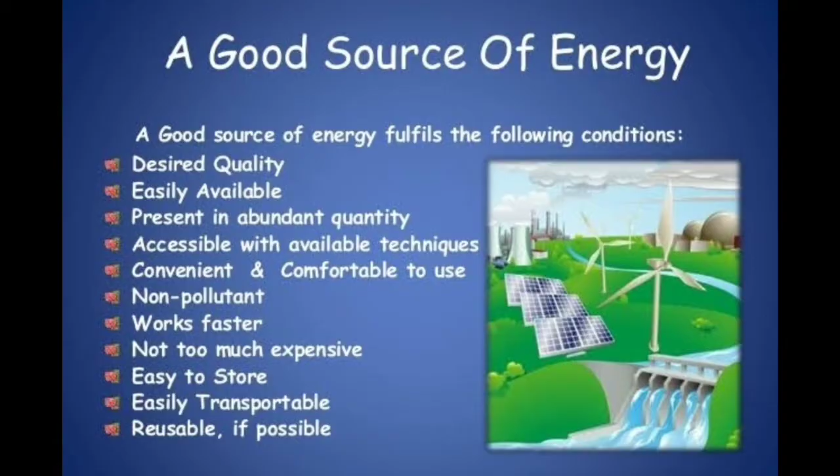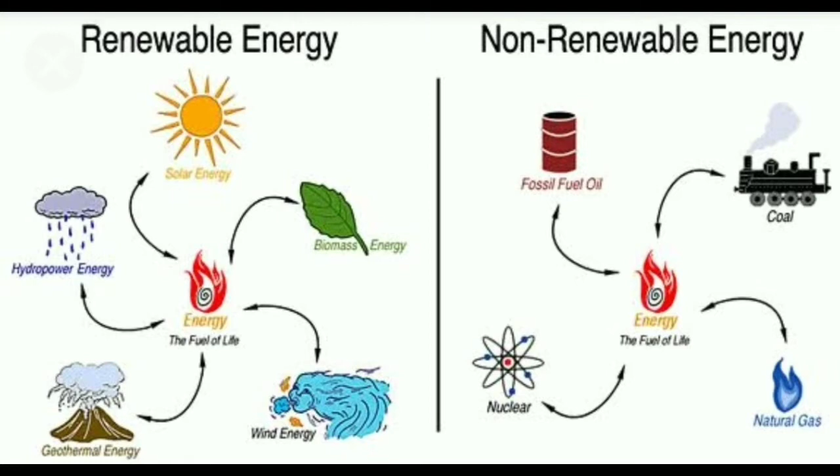Sources of energy can be categorized as renewable and non-renewable. The energy which can be replenished again is renewable energy, with sources like sun, water, wind, biomass, and geothermal. The energy which cannot be replenished again is non-renewable energy, with sources like coal, petrol, natural gas, and nuclear.

Conventional sources of energy are convenient to use, present in limited quantities, and have been used for a long time. Once they are depleted, they cannot be generated at a speed which can sustain their consumption rate.

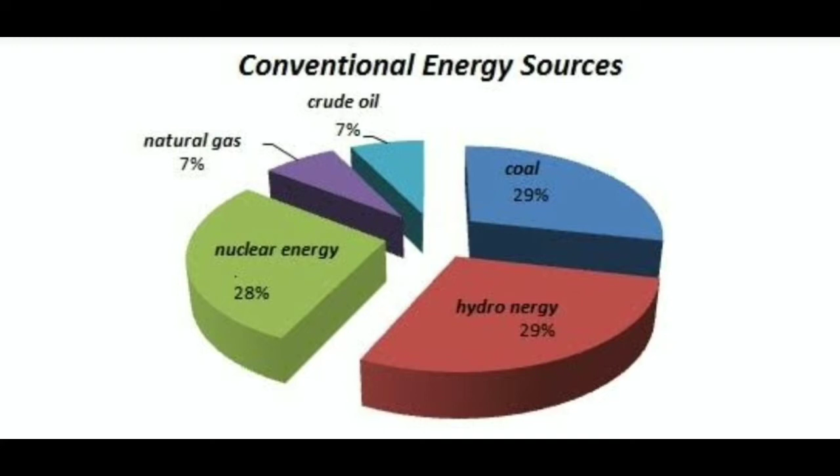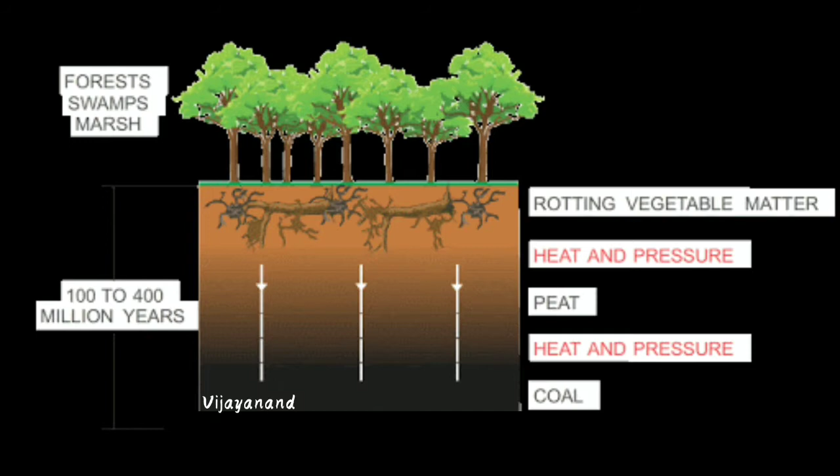Let us see how fossil fuels are formed. Fossil fuels are formed from decaying plants and animals that have been converted to crude oil, coal, and natural gas by exposure to heat and high pressure in the earth's crust over hundreds of millions of years.

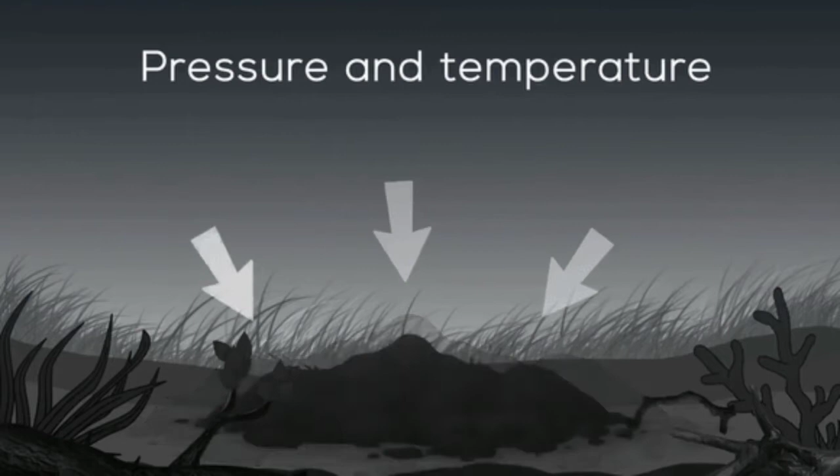To reduce pollution by increasing efficiency of consumption, electricity can be generated by thermal power plants. Large amounts of fossil fuels are burned every day in power stations to heat up water and produce steam which turns the turbine.

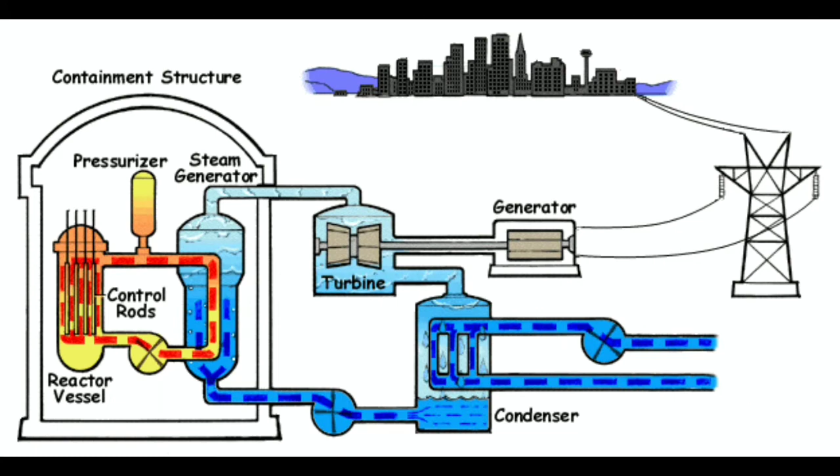The steam is converted back to water by taking out heat from it, done using a condenser. Rotating turbines move generators and electricity is produced, that is, mechanical energy is converted to electric energy. This is a major way of electricity generation, but it has certain problems like pollution, deforestation, and many more.

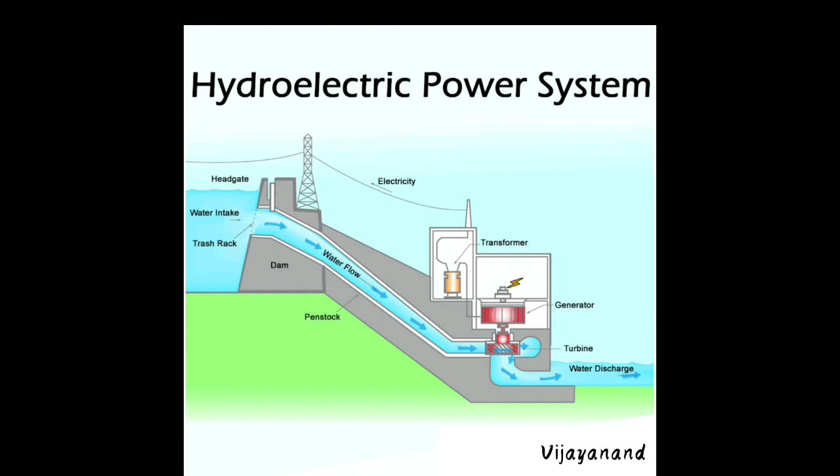Hydropower plants: potential energy stored in a dam is converted into kinetic energy of water. Fast flowing water is brought from the dam to the turbine, which rotates and drives the generators to generate electricity. Because of this, there are forced migrations of many people, submerging of forests and fertile land, and effects on aquatic life.

Biomass: the fuel obtained from living organisms is said to be biomass. All organic waste decomposes without oxygen, that is anaerobically, releasing gases like methane, carbon dioxide, hydrogen and hydrogen sulfide. These gases are stored and drawn through pipes for use, and the slurry left behind is used as manure.

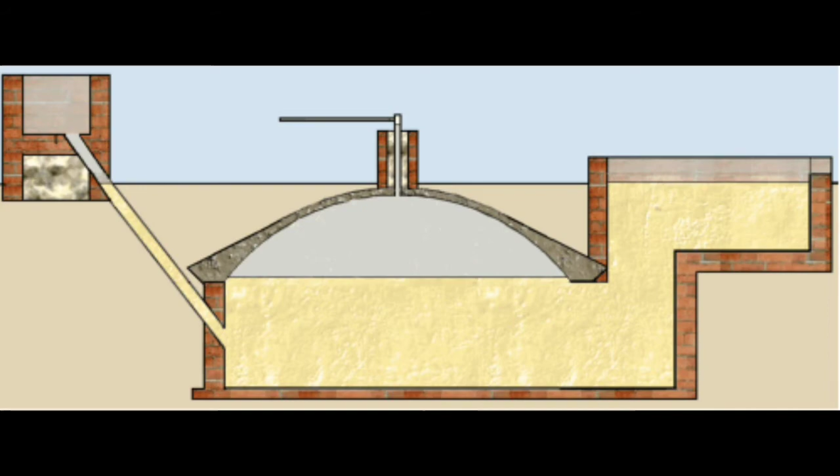Wind energy: the unequal heating of landmass and water bodies by solar radiation generates air movements and causes the winds to blow. As wind strikes the blades of the turbine, the blades rotate the axle of the turbine, which is connected to the generator through a gearbox, and mechanical energy is converted to electrical energy.

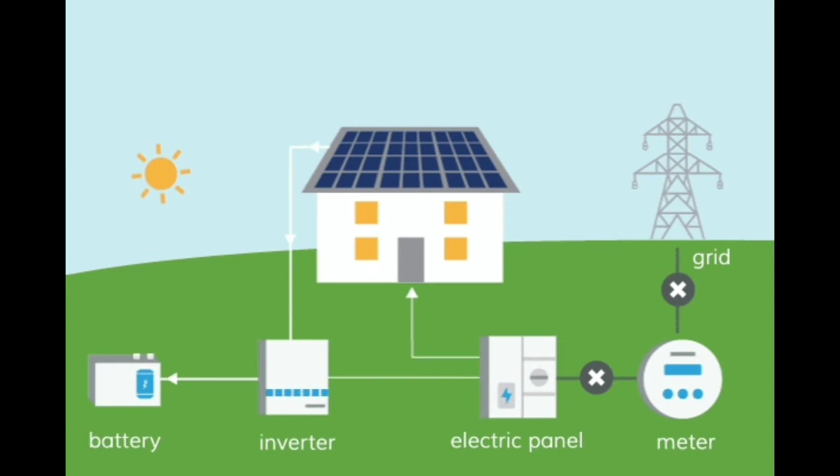Some non-conventional sources of energy: solar energy. Electrical energy can be generated directly from solar radiation without using generators and without using the principle of electromagnetic induction. Solar photovoltaic cells convert solar energy into electrical energy.

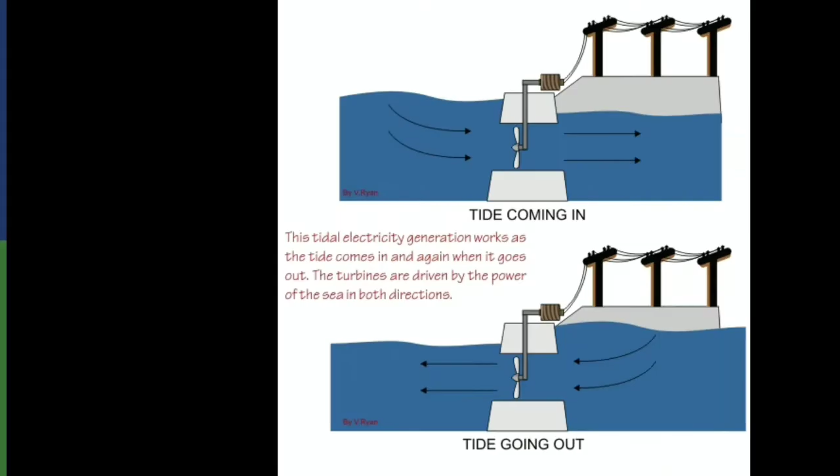Energy from the sea: tidal energy. Due to the gravitational pull mainly of the moon on the spinning earth, the level of water in the sea rises and falls. The difference in sea levels gives tidal energy. A turbine fixed at the opening of a dam converts tidal energy to electrical energy.

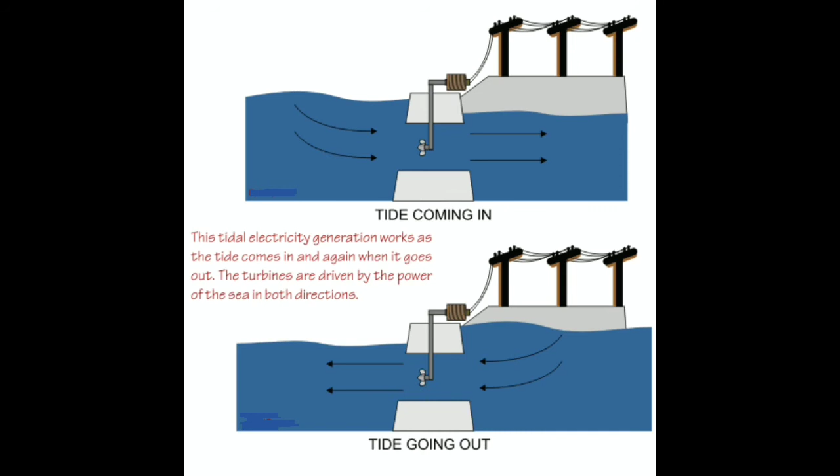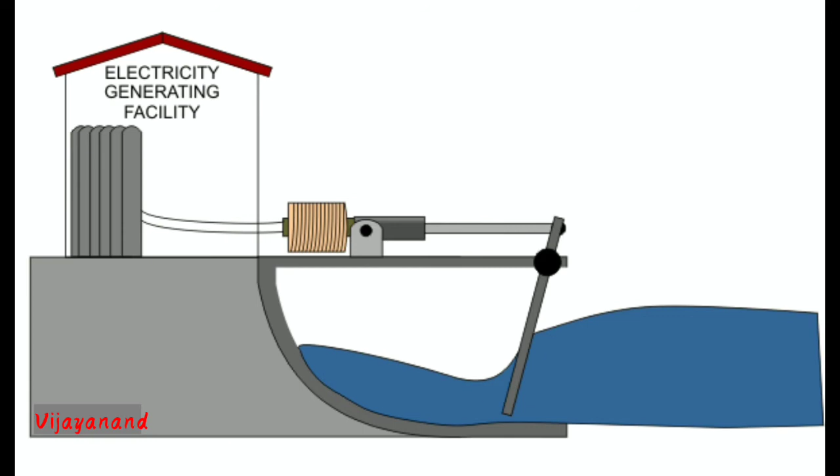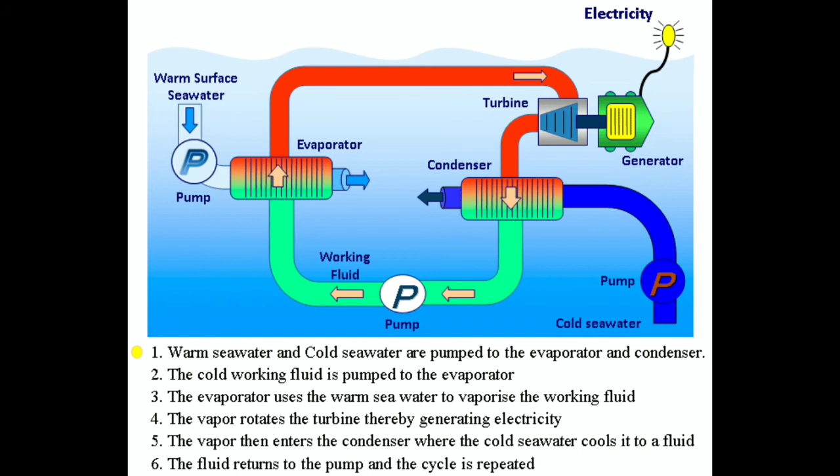Wave energy: waves are generated by strong winds blowing across the sea. The device traps wave energy for rotation of turbines and production of electricity. Ocean thermal energy: the temperature difference at the surface of the sea and deeper sections is used to obtain energy in ocean thermal energy.

Geothermal energy: due to geological change, molten rocks formed in the deeper hot regions of the earth's crust are pushed upward and trapped in certain regions called hotspots. When underground water comes in contact with the hotspots, steam is generated. The steam trapped in rocks is routed through pipes to turbines and used to generate electricity.

Nuclear energy: when an atom of uranium-235 is bombarded, it absorbs the neutrons and converts into the isotope uranium-236. Uranium-236, being extremely unstable, converts into atoms of barium and krypton through the process of fission, releasing three neutrons and a high amount of energy.

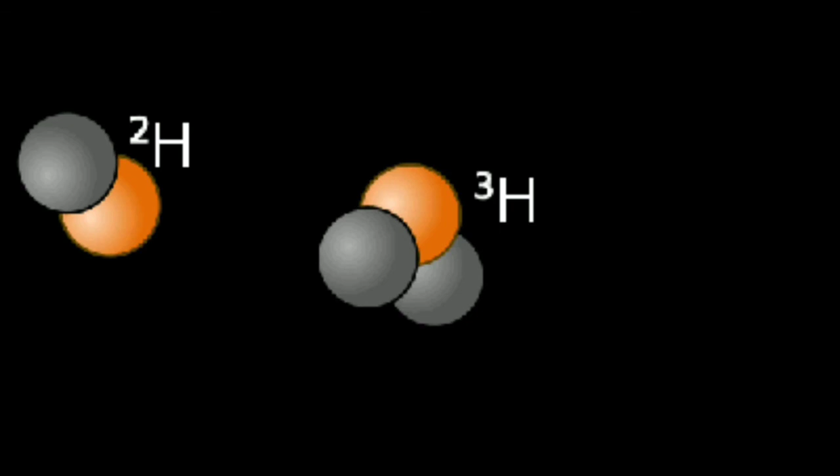Nuclear fusion: in this process, hydrogen is converted into helium. This releases a tremendous amount of energy. The conditions needed for this process are extreme, that is, millions of degrees of temperature and millions of units of pressure.

Research is continuously going on in the areas of producing long-lasting devices that will cause less damage throughout their life.